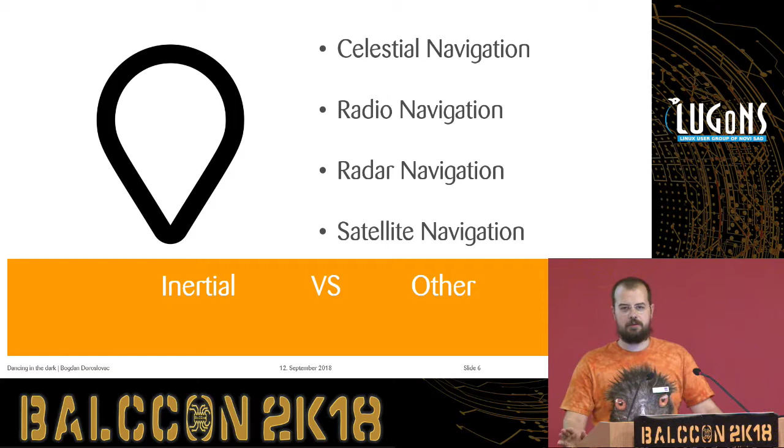Other types of navigation are outdated, so maybe somebody will, out of sheer change of heart, pull his sextant out in the middle of the sea, but you typically don't expect to see that these days. On the other hand, like we also heard in Zoz's talk yesterday, inertial navigation is pretty damn precise when done correctly. You cannot interfere with it. It's based on intrinsic properties of our universe and physics. And it's completely passive. You cannot interfere with it in any reasonable way. You would have to have hardware access to it.

And if we're talking about fast-moving vehicles like, let's say, rockets, you have a pretty slim chance of getting to it just to interfere with its GPS. If you're getting to it, you have other means of getting it in the first place. So, reliability is the key aspect.

Also mentioned in Zoz's lecture yesterday was the aircraft GPS. Typically, let's say Airbus will have what's called an ADIRU unit, so Air Data Inertial Reference Unit, or actually three of them, which will correlate and try to find where you are going, where you are heading, and the error should be slim, up to 0.1%.

And it's considered, again, ammunition, a tactical resource. You cannot get those components off the shelf. And one more thing that's good about inertial navigation, you can go at extremely high rates. For analog systems, you basically have no speed limitation. You can measure at the rates which coincide with your sampling rates, or even better, if you are competent enough, you can make a fully analog system using those properties.

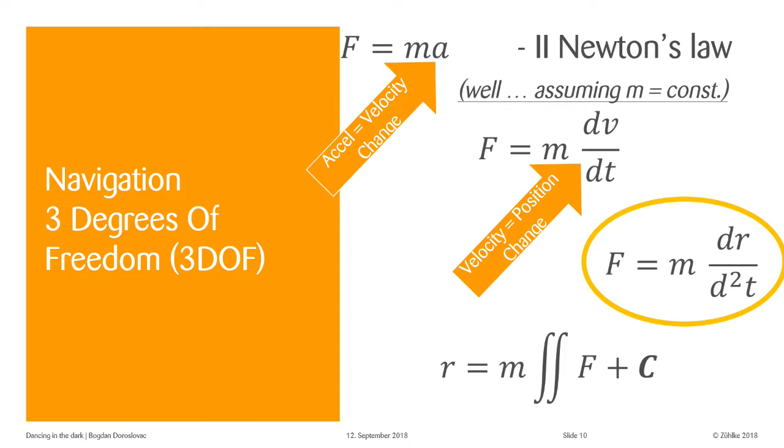Now, how the navigation actually works, let's take a step back to look at some classics of physics. Anybody here familiar with Newton's second law? Okay. Anybody here knows this formula? Well, anybody here knows that it's actually the wrong form of it? We are taught this in school as Newton's second law. It actually sounds a bit different. And this is with some assumptions. And please be careful about those, because precisely those assumptions make rockets fly.

And if you look at it, we define force as the thing giving an acceleration to the mass. In turn, acceleration is nothing but change of the velocity, which in turn is change of the position. And we have a way of getting the acceleration. And just by simple integration, turns out not to be so simple, but by simple means of integration, we can get back to where we are going. Now, how many of you forget the constant while integrating?

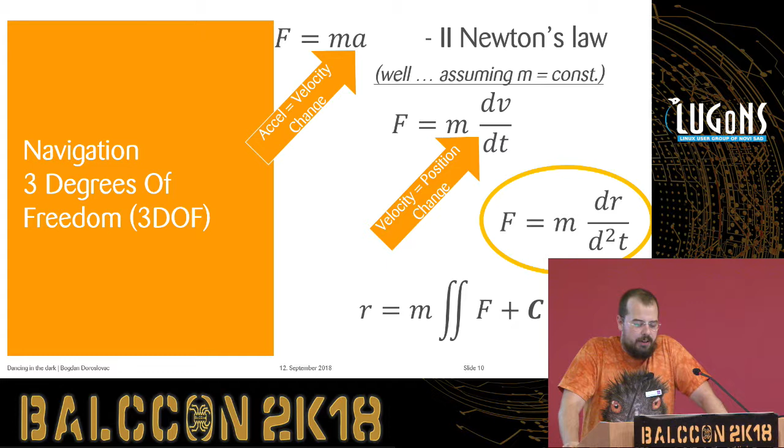While preparing this talk, an interesting thing, I made a small Octave demo for you, shifted from MATLAB to Octave and some sort of rotation and so on. And I spent 2 hours troubleshooting a thing that I missed. Initial conditions, therefore I missed the constant, and it took more than expected. So high school physics getting revenge on me.

Now, the accelerometer is a device that can measure specific force. Why is this important? It can measure something that we think is basically the force causing the movement of the object. Why specific? Because somehow gravity is also there. And funny thing, I don't know if you know it, but an accelerometer standing still will actually measure g, although not moving. And if you throw it in the air, it will happily measure zero acceleration while it's in free fall, so in sort of the apogee. Why is that? It's because accelerometers are actually measuring the total force applied on the object.

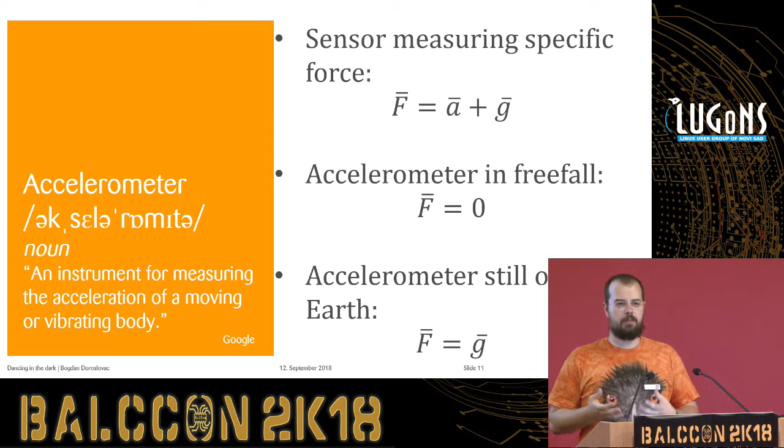Now, what you know of gravity is also a bit wrong, because it turns out it's not as simple as one might think. Well, gravity should point straight down, and it's not. It's pointing a bit slanted, because there's a thing called centrifugal, centripetal, I won't get into it, force, because if I say either of the two, I think somebody will burn me.

Anybody in the camp for the centrifugal force here? Centripetal? Okay, glad. Now, I'm glad it's so.

Regarding the flat earthers, based on the distance you want to cover, a gravity model might change a bit. So if you're talking, let's say, navigation a few kilometers away, we can happily agree that the Earth is a flat surface, completely flat. You may feel free to throw any tomatoes at me now. Please don't. And that gravity is a homogeneous field pointed down, whatever down may be. And the Earth is also suspended on 3 elephant trunks and so on.

If you want to go a bit further away, you need to use what are called spherical models. So something that we learned in school, just a big blob, pretty round, pointing towards the center, but it turns out the Earth is not completely round. It is actually more of an elliptical shape, a rotational ellipsoid. Even funnier, that is also not the case.

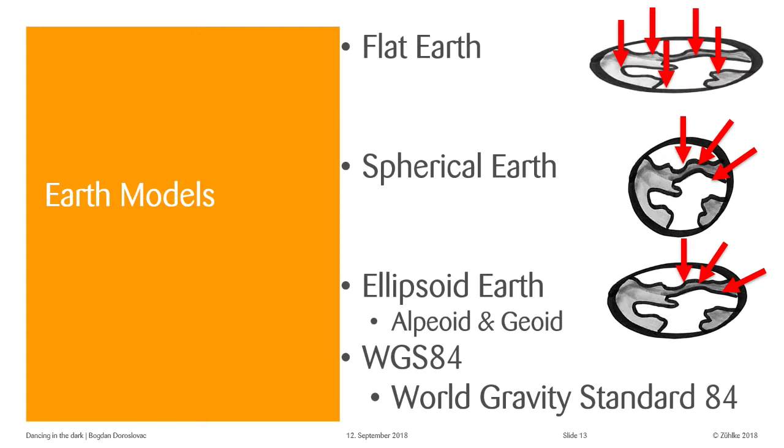And because of all that, finally in the year '84, so 3 years before my time, a bunch of smart people decided to make a standard out of it. And basically what it is, it's a referential ellipsoid with the gravity in all the possible places. So, if doing anything with the constants, don't be too smart about it. Go for this one. It's simple. You just punch in the latitude, longitude, altitude, and you basically get your effective gravity back.

If you try to calculate, to compensate, to do anything, you will surely fail. You will be closely failing, but failing nonetheless.

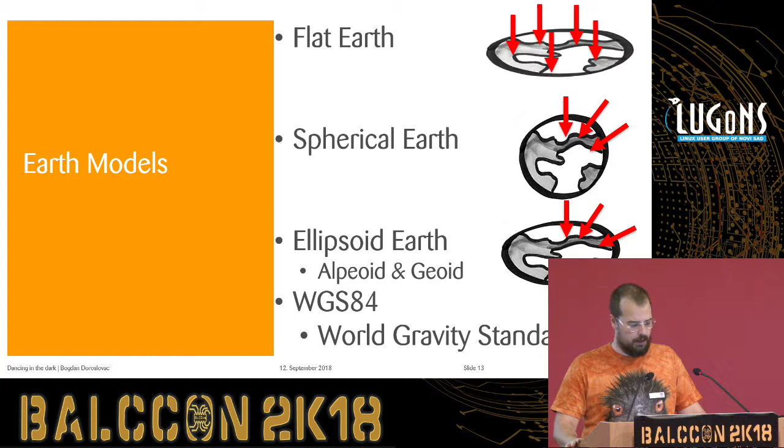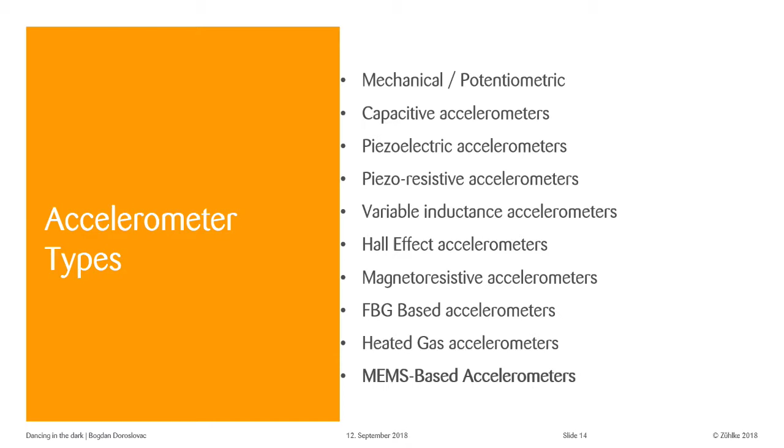Now, there are various types of accelerometers around, and I listed some of the devices that I am not even sure how they work. Like just yesterday I found out about the heated gas accelerometer, which is quite an exotic technology. Basically a bubble of gas that is heated in the center, and then based on the acceleration the temperature flux will change, and that can be detected.

One of the prime versions of the accelerometers widely used today is MEMS. MEMS is basically a microelectromechanical system. A tiny little thing, basically a quartz crystal on the substrate, that based on the acceleration will give out some voltage. And widely used are the ones in phones, with dimensions in millimeter ranges. Big accelerometers tend to be like this big.

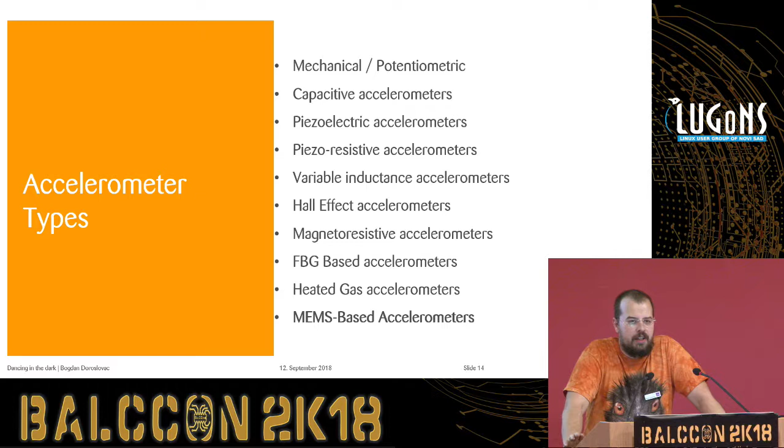And why do we need them, and where do we need them? That's the top priority question. We can only use accelerometers in referential frames or in the inertial frames, which are completely static to the universe. There is one such frame, and I will throw a lot of slides. I won't read them through. I don't think that's necessary, but eventually if you want to follow it and do something based on this, maybe it will serve a purpose.

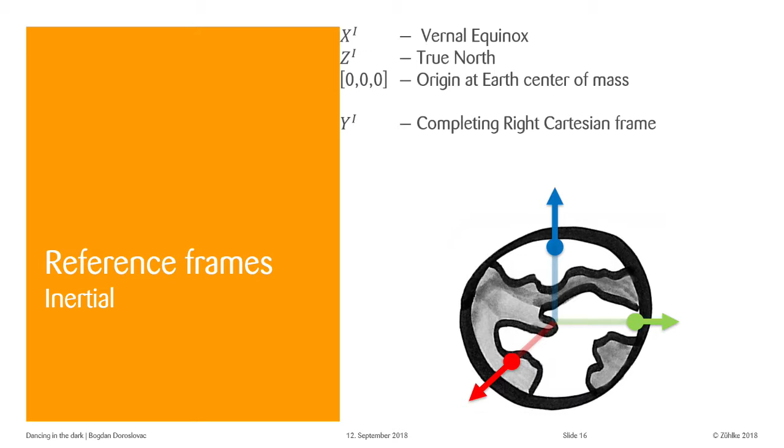Now, there's an inertial system. This is an ideal construct of an Earth static within the universe, everything else rotating around it. And basically it's there so we can do all the math nicely. In this system, Newton's second law actually applies. In the system where we are standing, it does not, because it's not inertial. It does not in the form that we know it. It applies with additional elements like the Coriolis force.

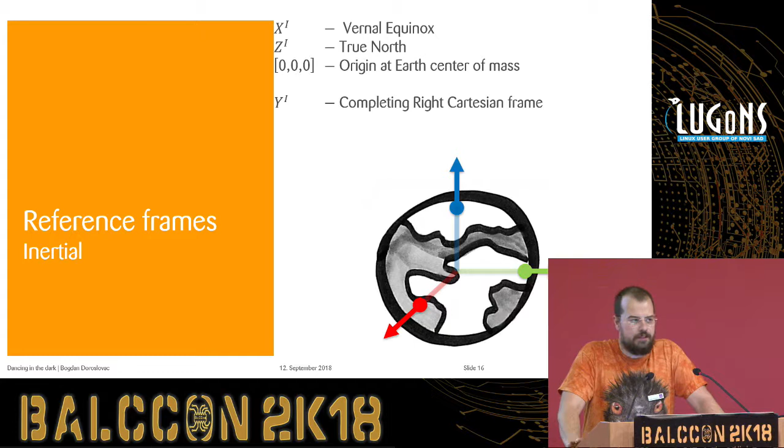Now, you'll notice here one interesting aspect again. North. There's a concept of true north. Why true north? There are actually many norths to begin with. What you see when you get your compass out is magnetic north, which is highly imprecise if you're getting close to the pole, and which not only is imprecise, but is shifting over time. So a lot of things like ADIRUs have to compensate with magnetic variation or MagVar tables, and so on.

And finally, it's not easily doable to have a precise magnetic navigation device because of a lot of soft iron and hard iron problems. If anybody has tried doing magnetic navigation, you will know that just having a screwdriver nearby will mess your readings tremendously, because the planet is in the microtesla ranges, and it's so damn weak that basically any sort of magnets, which we now have in abundance, especially the strong neodymium few-Tesla types, will easily mess with it.

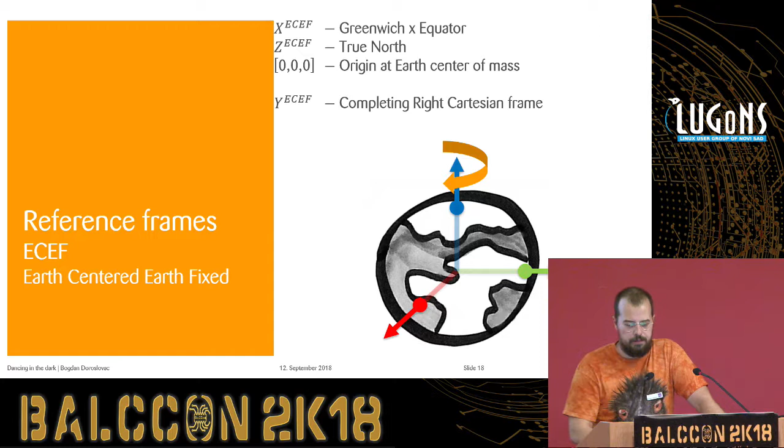The second type of north is geomagnetic north, which is the approximation of what we think magnetic north should be and where it should be most often. It's again just a nice concept for astrophysics, but for navigation it serves no purpose, and there is only one true rotational north, which is the axis around which the planet spins. You cannot determine that by magnets. That's completely impossible. You either have to know it, or you can use some smart methods. So, another reference system that we use is basically the Earth-centered, Earth-fixed system.

It is the same as the inertial system, but with a tiny quirk of rotating with the Earth. So the only difference between the inertial and ECEF system is that you just have to apply angular rotation to it, namely, in this case, about the true north axis or the Z axis.

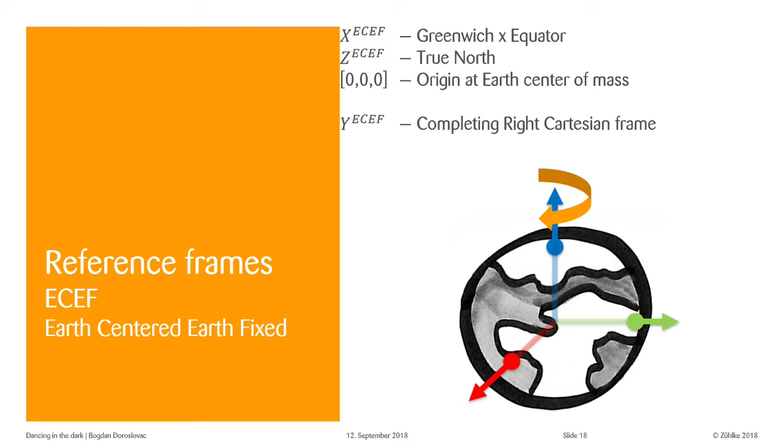Now, those were all global systems and did not help to determine where we actually are. So we need an additional thing. We need something which is local. And based on the literature that you're using, you will find that typically in the West you will use the north-east-down reference plane, or in the East, especially with the Russian authors, you will use the east-north-up coordinate system. Reasons vary. One of the prime explanations is basically that it depends which army type used it first.

So if you're looking at artillery, they will typically use ENU. If you're looking at aircraft modeling and so on, they will use north-east-down. They are completely analogous and easy to go between. And finally, we need somewhere to position our accelerometers and to start integrating. We have our body coordinate system.

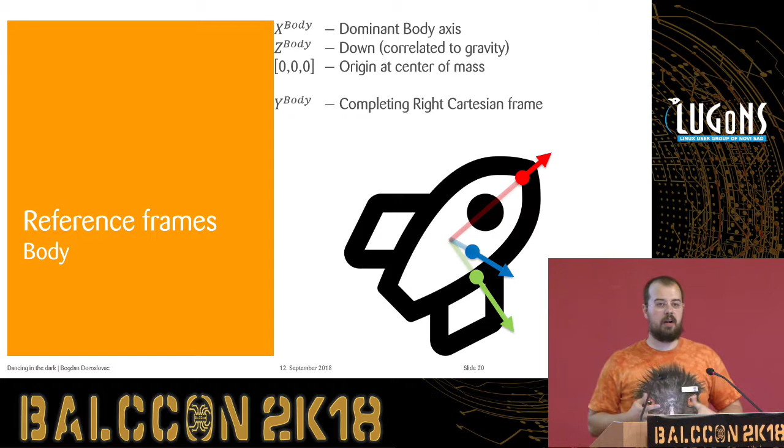Here there's quite a nice rockety thingy. And the idea is that basically we are always in the Cartesian reference plane. So we have 3 axes of freedom. To cover that, we need 3 accelerometers. And now we have a problem. It turns out that we only know how our center of mass is moving; we don't know anything about the whole body structure. And that is precisely the 3 degrees of freedom navigation versus the 6 degrees of freedom.

But now, in modern systems, we don't use such gimbaled contraptions because it's highly complex and highly expensive. The typical approach is to use the strap-down navigation system, which does all the calculations and basically forms a virtual platform which is analogous to one being in the middle. And it does so by constantly rotating the thing. These are some reference matrices; basically, in order to be able to rotate about an axis, you need to use this.

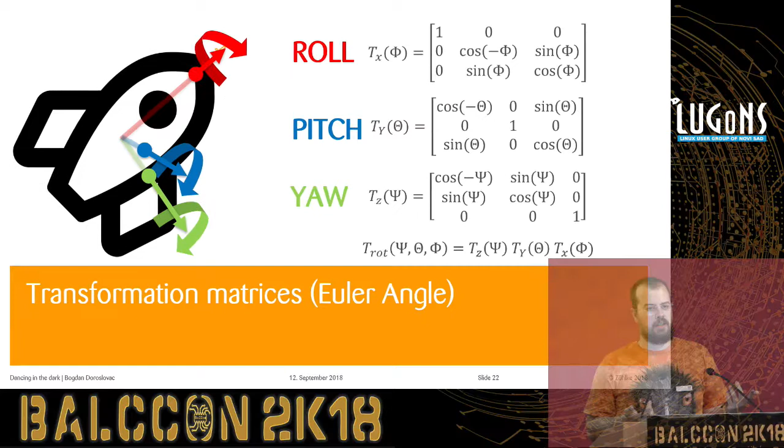Anybody familiar with 3D graphics will notice that it is pretty much the same as what you use to rotate images. And navigation is actually simpler, because skewing is not possible for rotation matrices. There is no scaling, there are a lot of these eigenvectors, cool features. You can forget all that and just use simple rotation and translation.

Typically Euler angles, as they are called, are named alpha, beta, and gamma. But much more widely used, and the thing that I'm citing here, are roll, pitch, and yaw, which are basically the 3 properties of the navigating body. The roll is the rotation about its dominant axis, typically the axis of symmetry, let's say, of a missile. The pitch will be its tendency to go up and down, and the yaw will be its tendency to go left and right.

And you will notice that in missiles it is decoupled, while in aircraft it's highly coupled. It's typically roll and yaw. You cannot that easily shift that system.

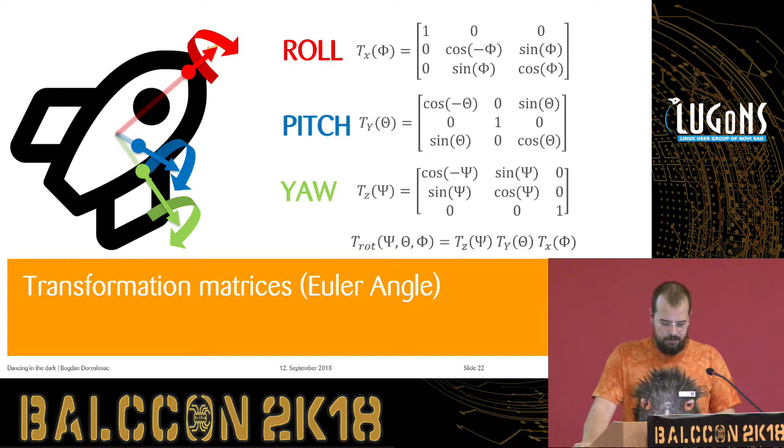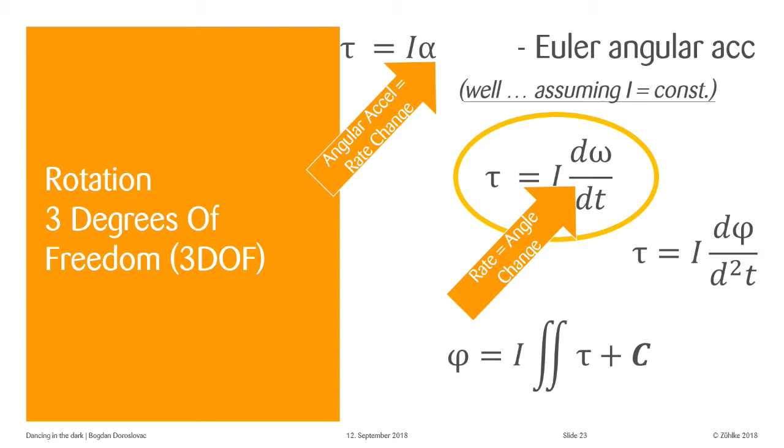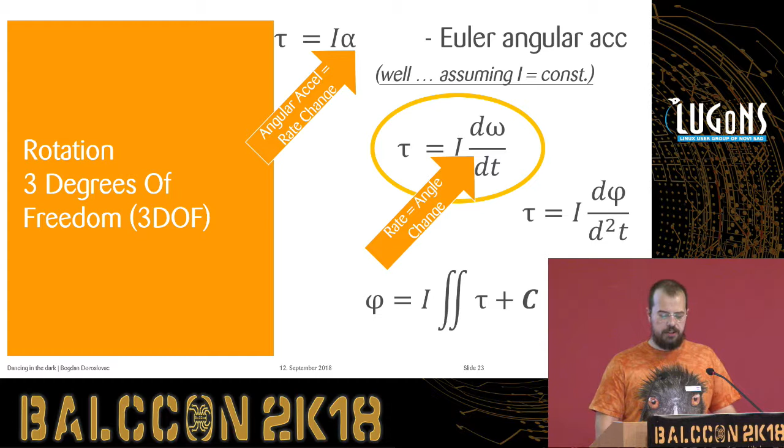Now, okay, so how do we get our strap-down navigation working at all? Well, there is this Euler angular formula, which is quite analogous to Newton's second law. Basically, it dictates how you can find out your current angular acceleration by means of knowing the moment of inertia, which is the fundamental inertial property of the body, like mass is for the point. And basically you just calculate all the outer forces that are affecting you. You will notice that here we can just stop at the first integration, but we can discuss it.

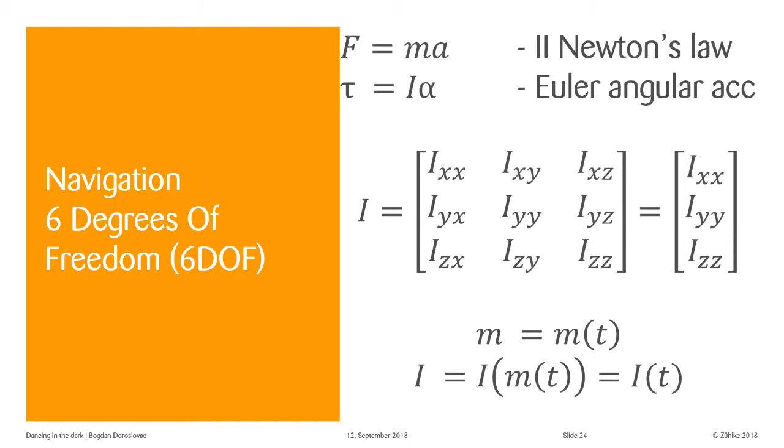And now we've got all 6 equations, everything that we need. And how do we proceed? Well, we just integrate our merry way along. One interesting property here. How many mechanical engineers are here?

Super awesome. So what's interesting here? Symmetrical systems, or highly symmetrical systems, are much easier to compute than non-symmetrical ones. So the inertial tensor, the matrix, the big blasted thing there, tends to degrade to a smaller vector if you are using missiles. So there's a lot of good things going simple. An aircraft would not be as simple as a missile.

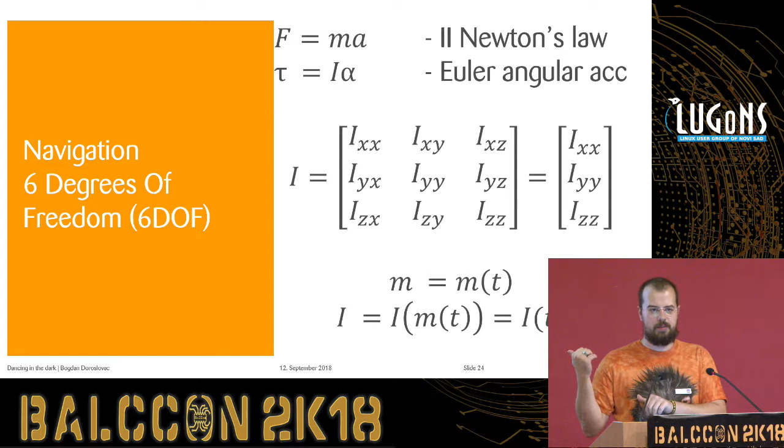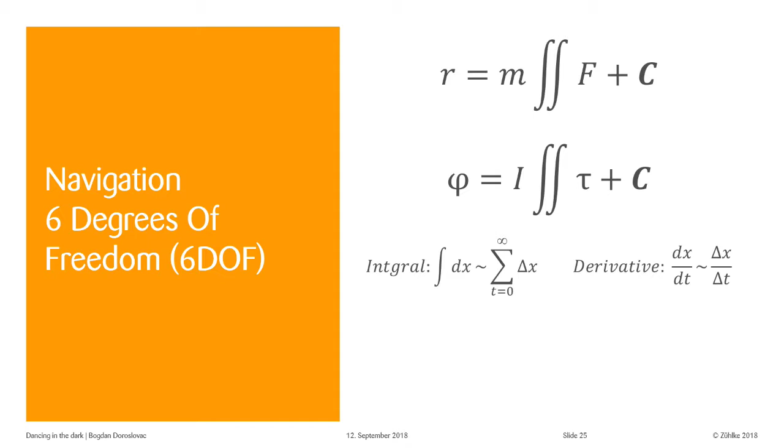Now, for the programmers out there, it's not all hardcore math. It turns out that we can just discretize. What does it mean? Basically, what's an integral? An integral is nothing but the cumulative sum, and that's it. If you're fast enough, if you're precise enough, you don't have to be super smart about it. You don't have to estimate it. You just have to be at least 10 times faster than the response of your system. If you are good there, and if you can provide that speed, you're safe to integrate, and that's it.

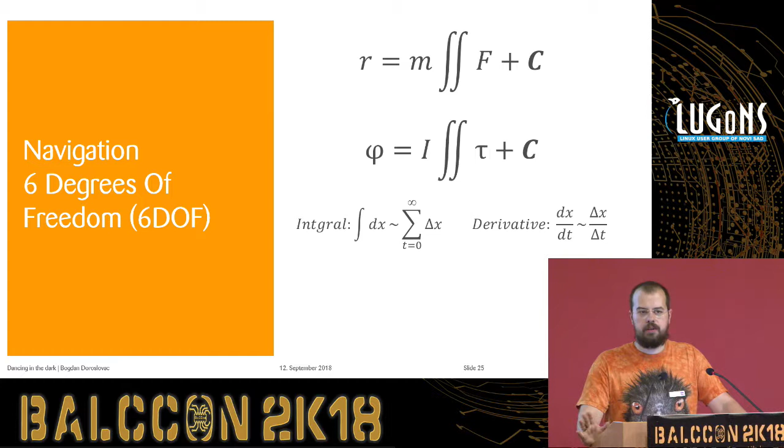Also, derivatives are nothing but sample over sample changes. The discrete derivative is just that. You just take the two values and look at them, how they are.

Now, for the angles, we use gyros. And gyros are an extremely interesting piece of technology. They basically fall into two types. One being the absolute gyro, or the position gyro, which is what you know as a spinning top, a thing trying to stay in the place as it was, and the other one being the rate gyros, which are actually telling you what the rate of the movement is.

And there are more exotic technologies like the ring laser gyro and the fiber optic gyro. They are about the thing called the Sagnac effect, or I hope at least the guy's name is pronounced like that. The Sagnac effect is basically bouncing light beams through the mirrors and measuring the phase shift. And basically by the difference in the phase shift, you can see how you are moving.

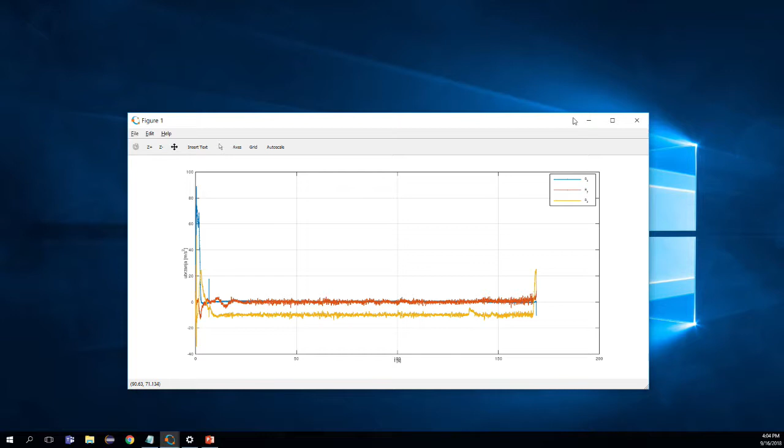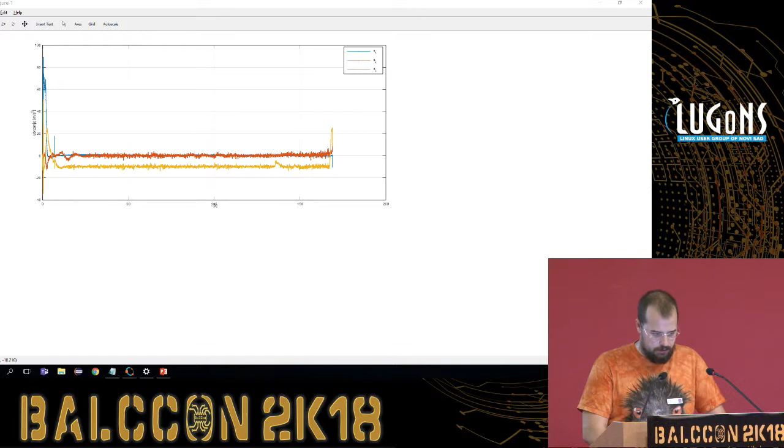And I would like to show you some small thing, if it works. First of all, please do work. Okay. So this, come on. This is actual data of 3 accelerometers. Okay. Sorry, my Octave is a bit laggy today. And it will full screen eventually. Okay. Yes.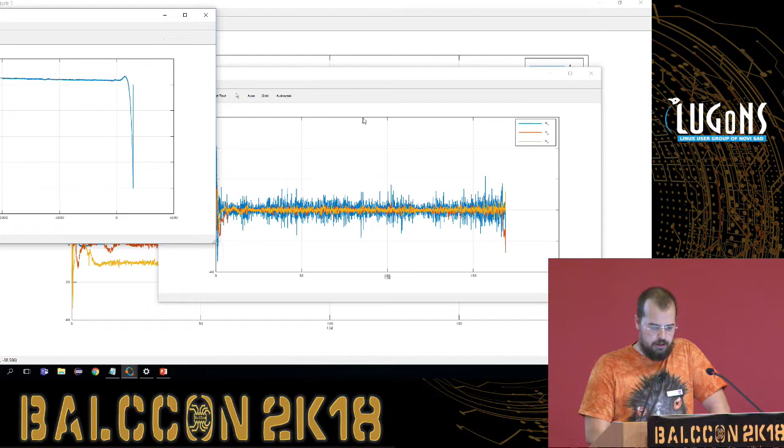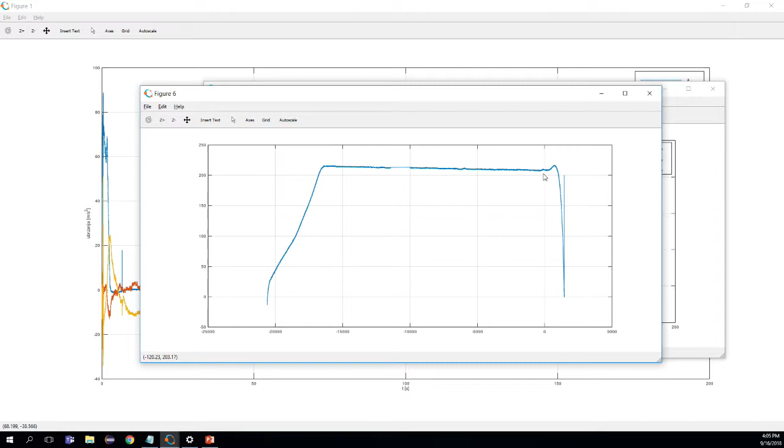So, based on those data, we get a flight profile. And this was provided by my ex-boss and colleague, so thanks. If you look at the flight profile, it's pretty characteristic, it's basically a missile. Nothing too strange about it. You can notice the period of getting to a certain speed or to a certain altitude in this case, cruising at predefined parameters, and then homing for the target somewhere in this area.

And another thing that I would like to show is a demo. Let's hope my laptop does not die. Yes. More or less. There is quite a disparity between what I expect when typing and what's happening now. Okay. So, okay.

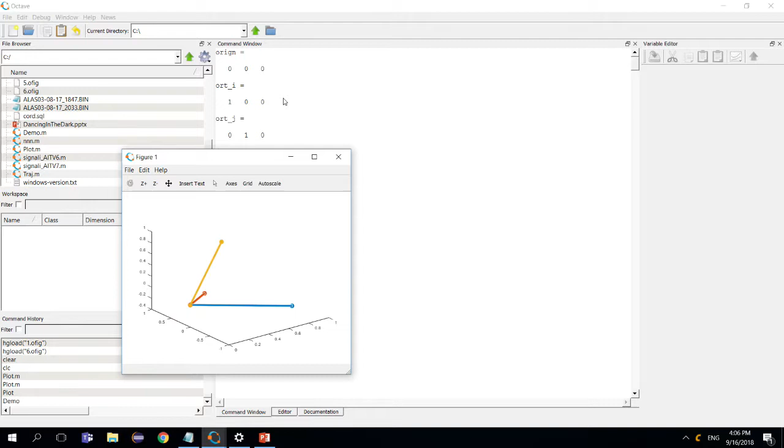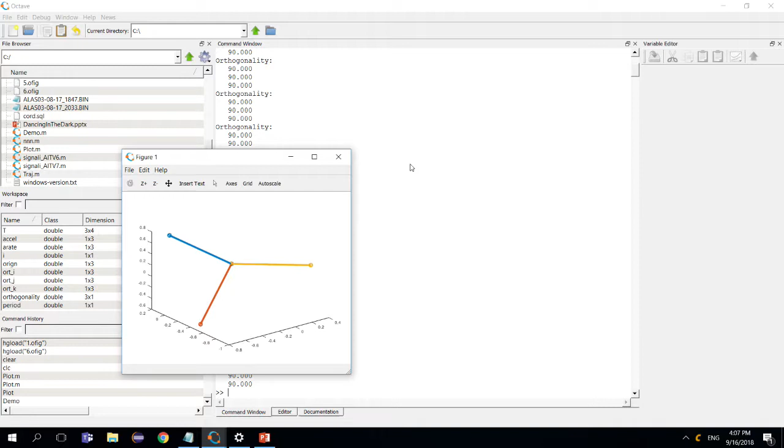Here is a small, simple system rotating. Anybody interested in the code can get it off me. And it's been written completely in Octave. Here there's just my small check to make sure that the reference frame is not in any way degrading over time, which can happen. Here you can take a look at basically what it is. It is the rotation matrices. I know that there are packages doing it probably better than me, but for this presentation I wanted to do it from scratch. Why not?

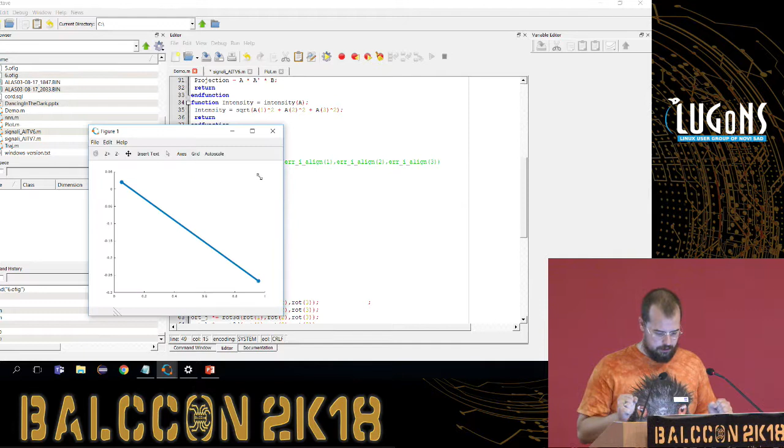And we can fiddle around with it. We can, for example, change a scale, give it some sort of acceleration. Don't ask me about the numbers, they're pretty much based on what I feel should be right. And if we cross our fingers and run it, yes, it did not explode. So the thing will start to move in space, and we still didn't lose orthogonality. So

One final thought is on Quaternions. Eventually, while redoing the lecture for the format, I decided to omit the Quaternions as it would be too much math, but I just want to give you food for thought on what it actually is. It's widely used in 3D graphics, and it's super awesome. Again, it has two approaches, navigation and 3D vector graphics. If we go back to how we position our platform in Euler angles, what we do is we have a component of rotation. And each rotation can be separated into 3 components, yaw, pitch, roll. What Quaternions do is take the shortcut and find the one perfect rotation that gets your system into place.

And how do they do it? By magic. It is basically a 4D system with 3 of the axes having -1 intensity. It's called Hamiltonian space, so basically it transforms your physical coordinates into a higher plane of reference, does some mathematical magic, which is extremely elegant, so everything is multiplication and addition, unlike Euler angles where everything is sine, cosine, and if you get close to 90 degrees, everything explodes. In Quaternions, you don't have that issue. Everything plays nice, but you have to transition into this abstract mathematical space construct.